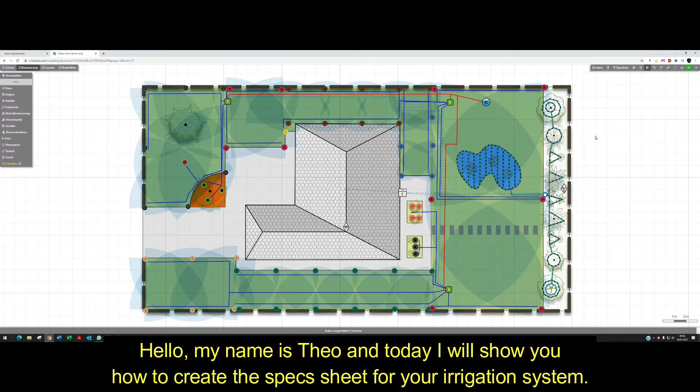The program can generate the spec sheet only if all components or pipes are connected. Also, drip start points and cables must be connected. Unconnected elements will not be displayed in the list.

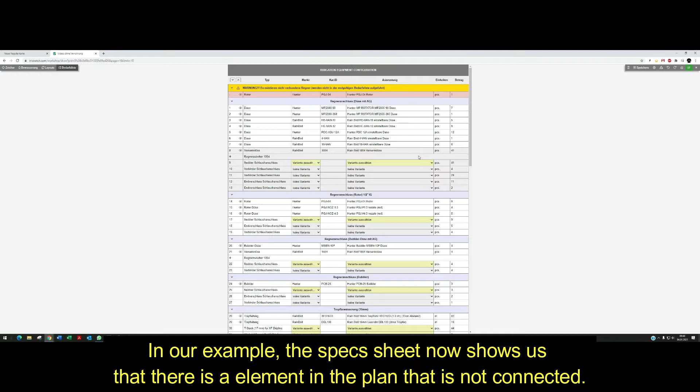To make sure that all elements are connected, we switch to the spec sheet. In our example, the spec sheet now shows us that there is an element in the plan that is not connected. In this case, it's a sprinkler.

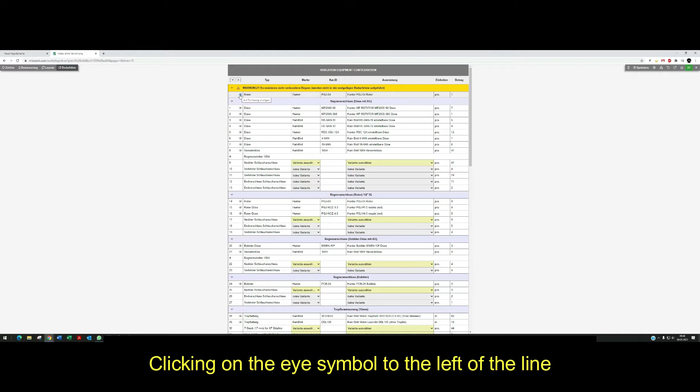Clicking on the eye symbol to the left of the line, IRRISketch jumps back to the irrigation plan and shows us the unconnected component. If we connect the sprinkler and go back to the spec sheet, the error message disappears.

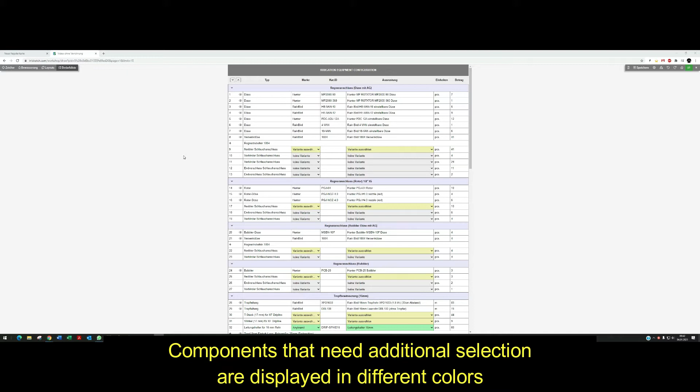The spec sheet automatically takes all the connected elements from our irrigation plan. Components that needed additional selection are displayed in different colors. And we have the possibility to select different products from different manufacturers.

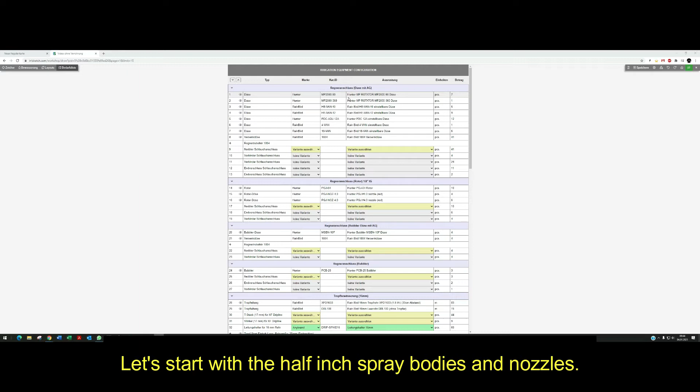Let's start with the half-inch spray bodies and nozzles. Here we can see all the installed nozzle bodies - the Rainbird 1804 spray body with the amount of pieces and the corresponding nozzle with the respective amount.

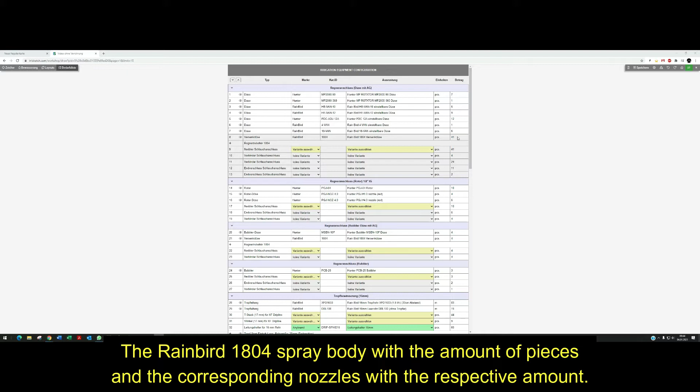MP rotators, HE-VAN nozzles, R-VAN nozzles and even classic spray nozzles. Below we have the possibility to choose different accessories for the sprinklers.

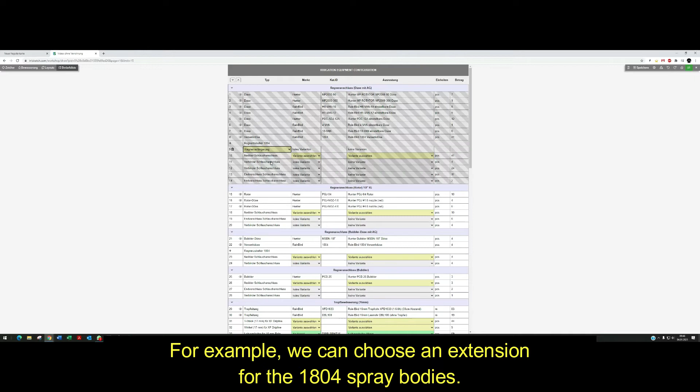Click the plus and a new row appears. For example, we can choose an extension for the 1804 spray body. Here we can determine the quantity.

And if we want to delete them again, we click on the trash can. One row below, we are asked to select a flexible connection between the spray bodies and the pipe.

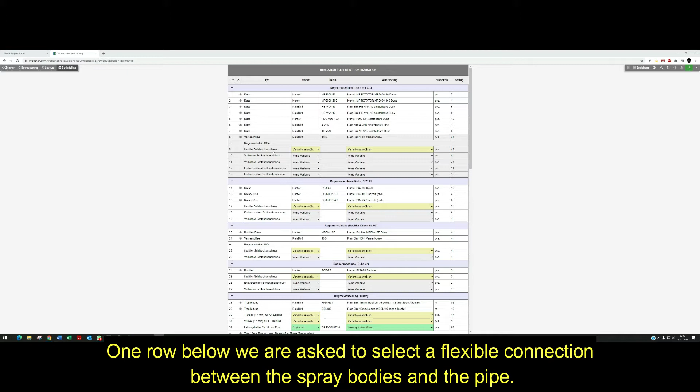The other rows are still inactive because they become active only after we select the sprinkler connection. We select a Hunter half-inch 30 cm swing joint.

IRRISketch automatically gives us the correct amount of the installed 1804 bodies. Now the other rows are also active.

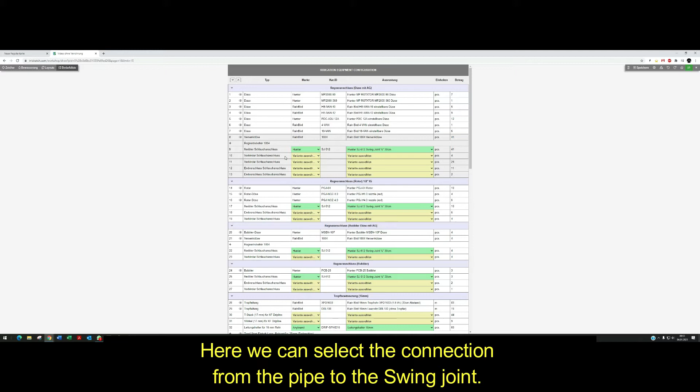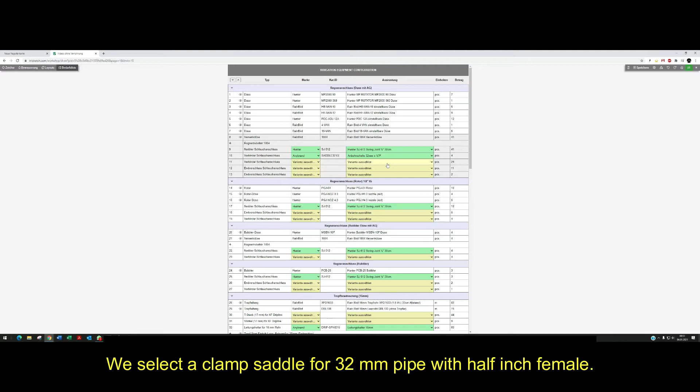Here we can select the connection from the pipe to the swing joint. We select a clamp saddle for 32 mm pipe with half-inch female. The program specifies 4 of these clamp saddles.

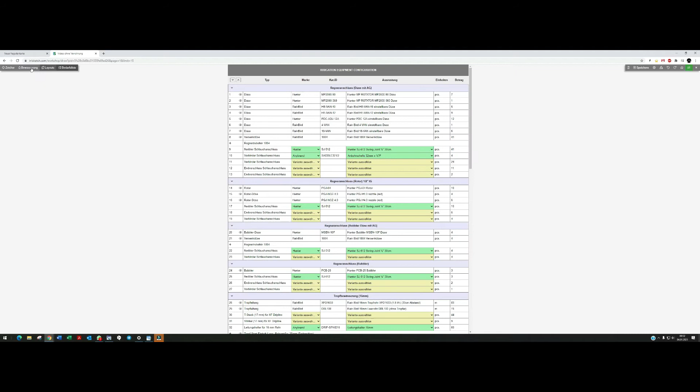Let's look again in the irrigation plan. Here is the zone with the R-VAN nozzles, 4 of them on the 32 mm pipe.

On this pipe, instead of the half-inch clamp saddles that IRRISketch suggested, we should select a 3/4 inch clamp saddle.

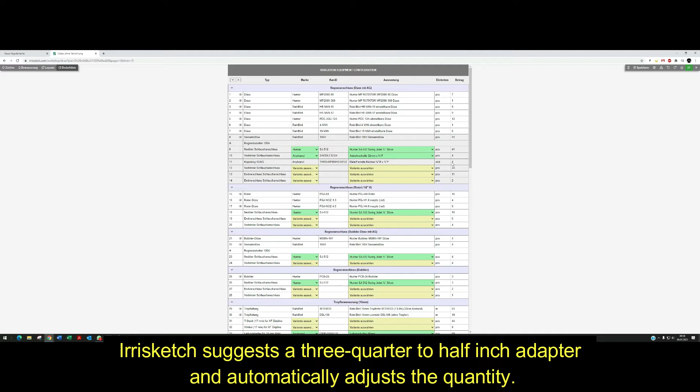IRRISketch suggests a 3/4 to half-inch adapter and automatically adjusts the quantity.

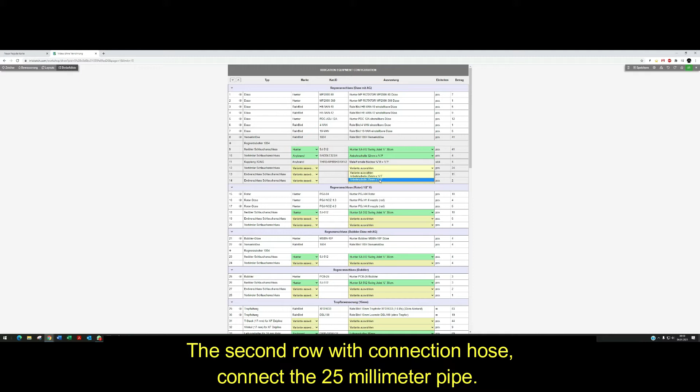The second row with connection hose connects the 25 mm pipe. Again, we choose a 3/4 inch saddle clamp. The number of adapters needed is automatically increased.

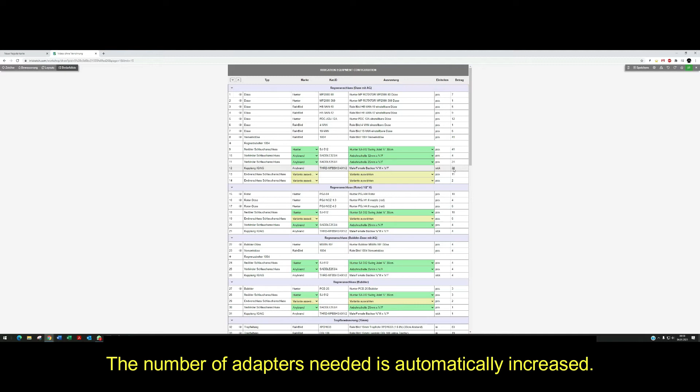In the next row, we are asked to choose the end caps - once for the 25 mm and once for the 32 mm pipe.

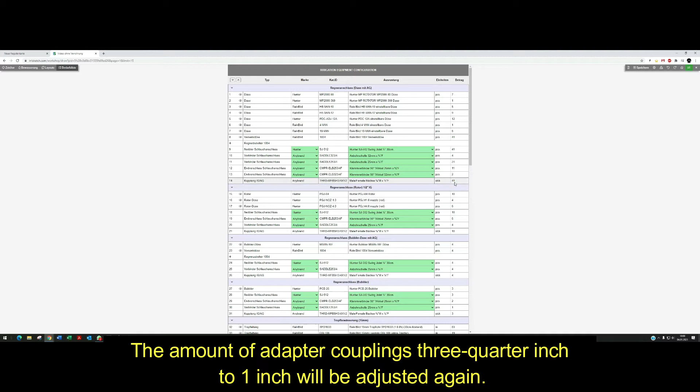The amount of adapter couplings 3/4 inch to 1 inch will be adjusted again. We can dispense with all the adapters in this case by simply changing the swing joint to one side half-inch and the other side 3/4 inch.

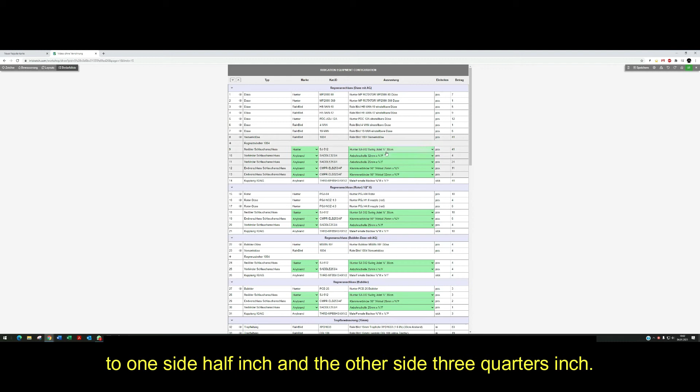IRRISketch will automatically apply our selection for the sprinklers to the half-inch rotor nozzles and the bubbler nozzles as well.

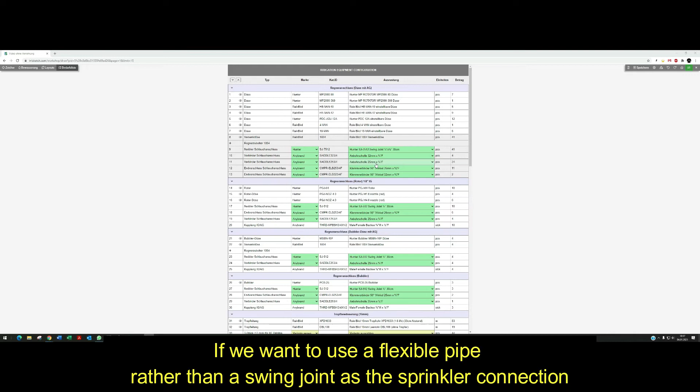If we want to use a flexible pipe rather than the swing joint as a sprinkler connection, we can pre-select flex pipe and clamp saddle in the configuration under sprinkler nodes.

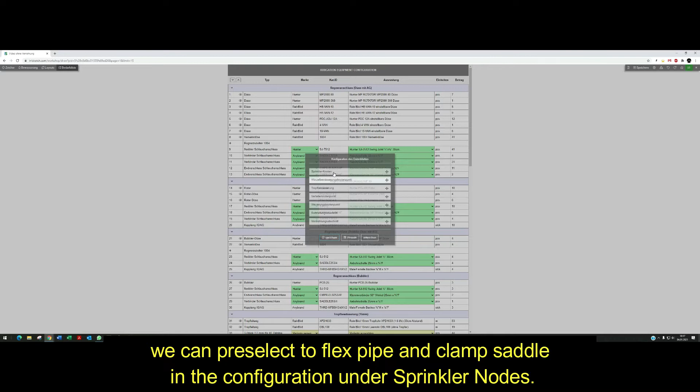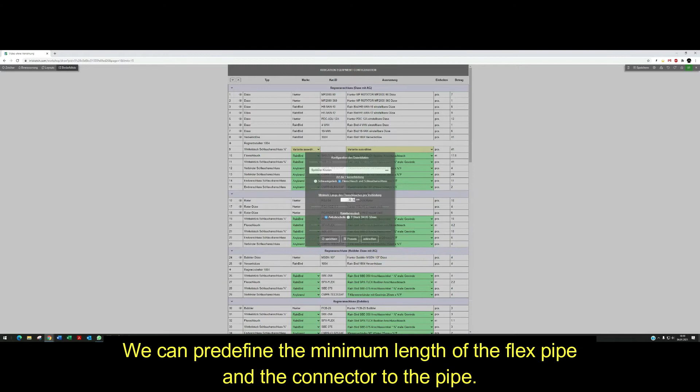We can predefine the minimum length of the flex pipe and the connector to the pipe, and if you want to use clamp saddles or T-fittings. We can select elbows or straight adapters as the end fittings.

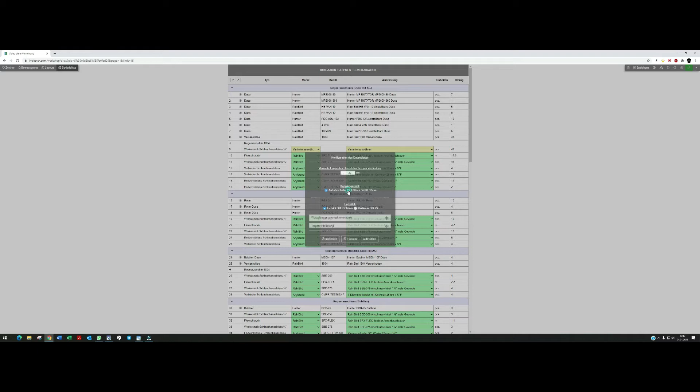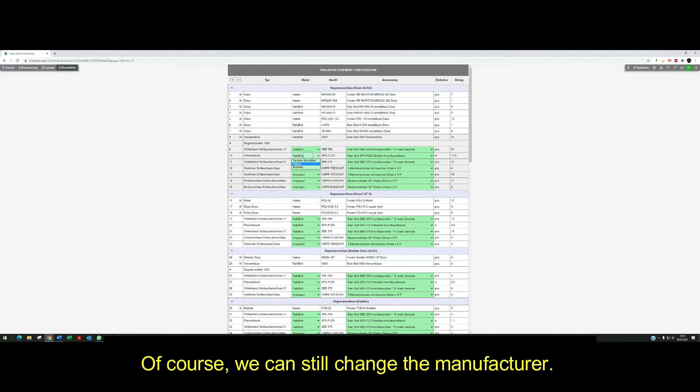We choose the elbow half-inch for the sprinkler bodies from Rainbird, also the flex pipe from Rainbird. Of course, we can still change the manufacturer.

The required quantity of the flexible pipe is 17.8 meters, as automatically calculated by the program. One line below are the elbows of 3/4 inch.

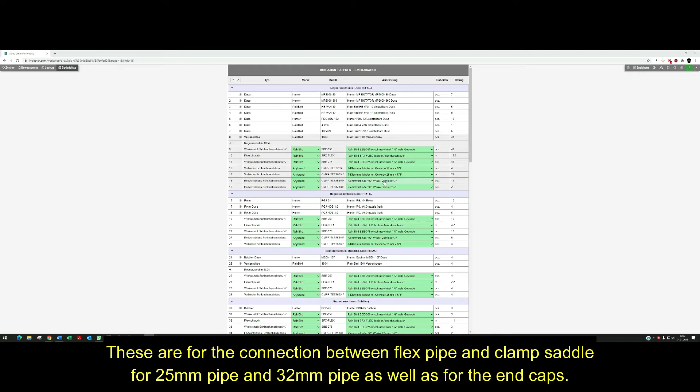These are the connection between flex pipe and the clamp saddle for 25 mm and 32 mm pipe, as well as the end caps. The rotors and bubblers have to be changed from swing joint to flex pipe.

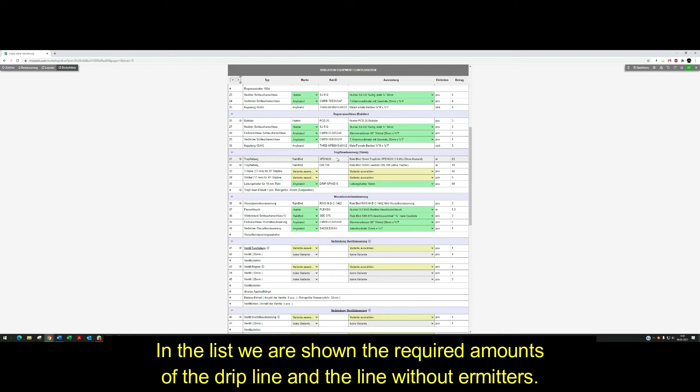Further down we find the elements for the drip irrigation. In the list we are shown the required amounts of the drip line and the line without emitters.

We only have to select whether we want the T-piece and elbows as barb or as twist lock variants.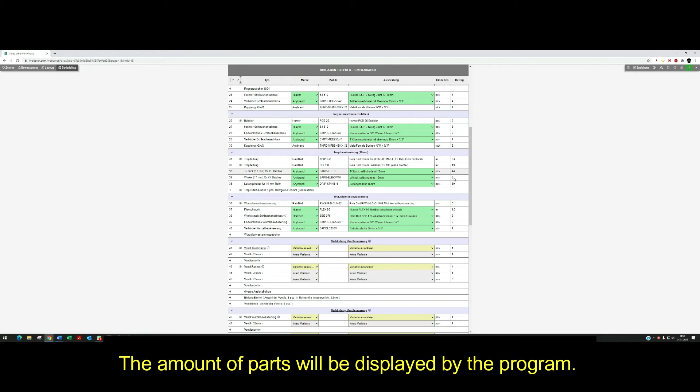The amount of parts will be displayed by the program. The amount of the tie-down stakes 60 mm is also given by the program.

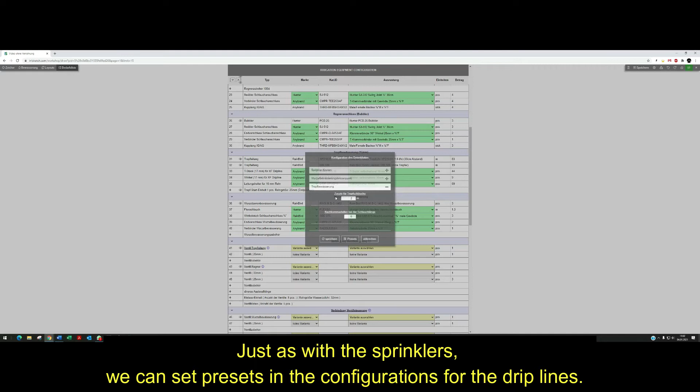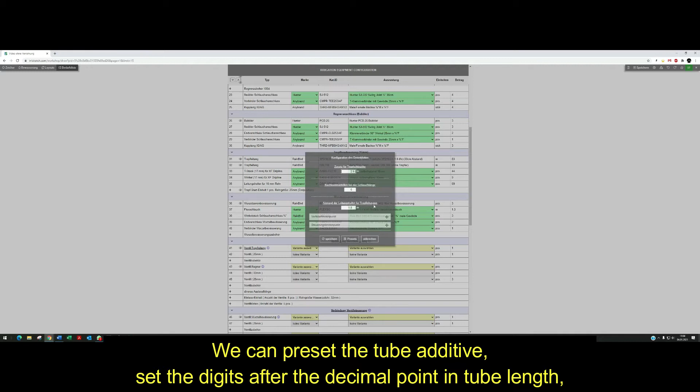Just as with the sprinklers, we can set presets in the configuration for the drip line. We can preset the tube additive, set the digits after the decimal point of tube length, and configure the drip line holder spike step.

We change the distance to 1 meter. Save, and already the amount of spikes changed accordingly to the length of the drip pipe.

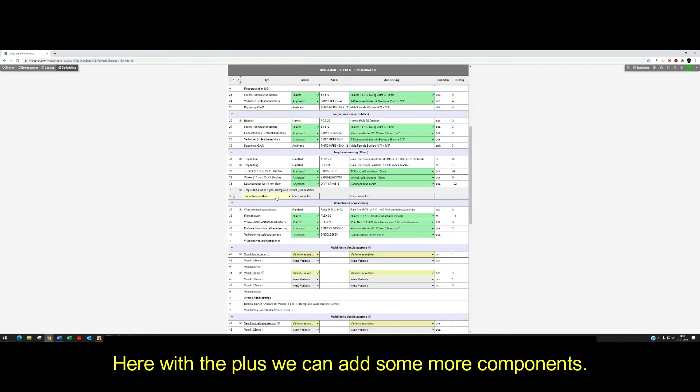Here with a plus we can add some more components. IRRISketch reminds us that we have planned one drip start, and here we could add a drip start.

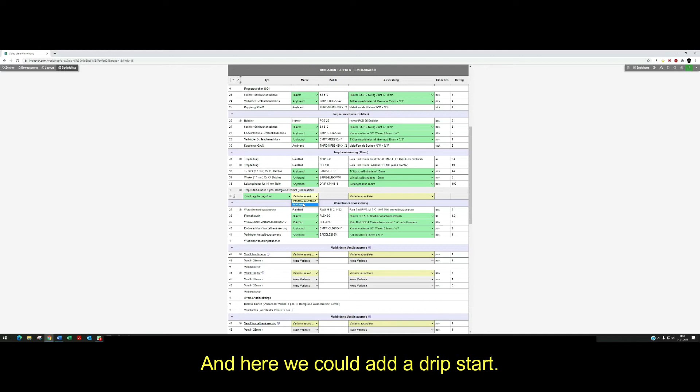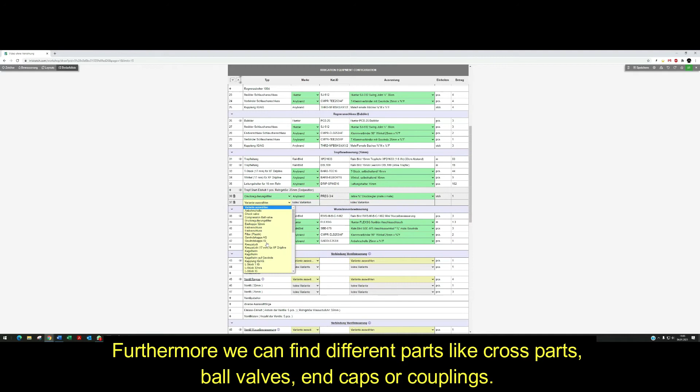The drip start unit, in this case the pressure regulation filter, can be added in the drip menu. Or we select a valve with pressure regulating filter. Furthermore, we can find different parts like cross parts, ball valve, end caps and couplings.

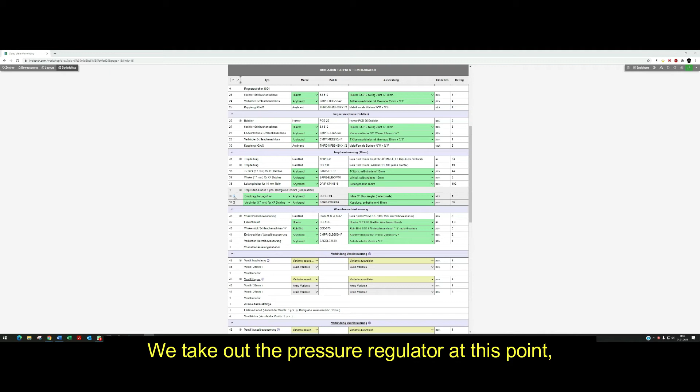We take out the pressure regulator at this point, because we want to install a pressure regulator filter in the valve box later. Now let's look at the valve box items.

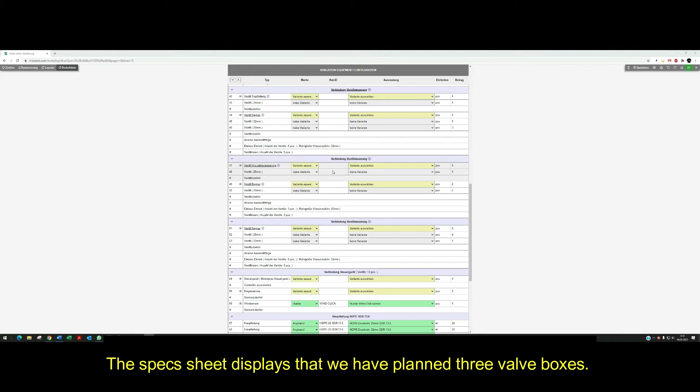The spec sheet displays that we have planned 3 valve boxes. If you want to know which of these valve boxes it means in the plan, we click on the i symbol next to one of the components. The program jumps into the irrigation plan and shows us the box.

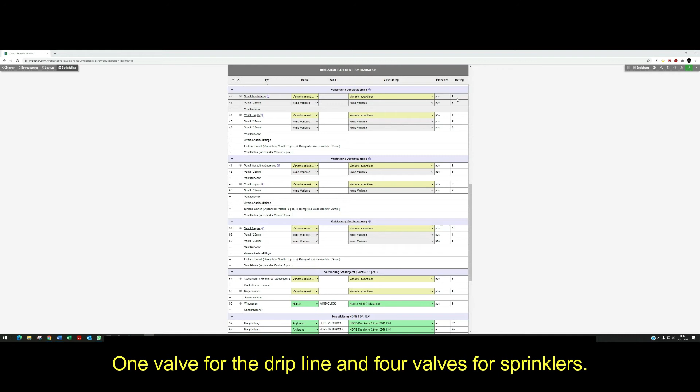In the first box we have 5 valves: 1 valve for the drip line and 4 valves for sprinklers. We select the valve for the drip line. We can go to different manufacturers and variants of different valves. In this case we choose a valve with an attached pressure regulating filter.

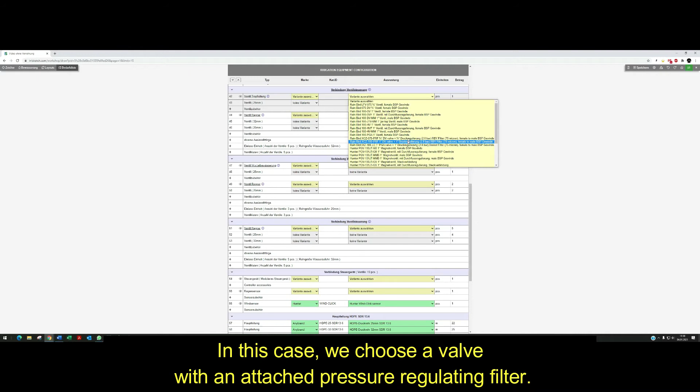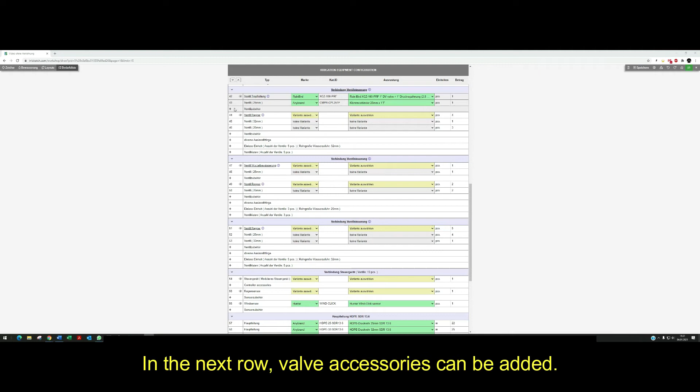The outlet connection from the valve to the pipe is already specified by the program. In this case, a clamp saddle with 25 mm to 1 inch female thread. In the next row, valve accessories can be added. We can add another row with a plus, but there are no accessories available.

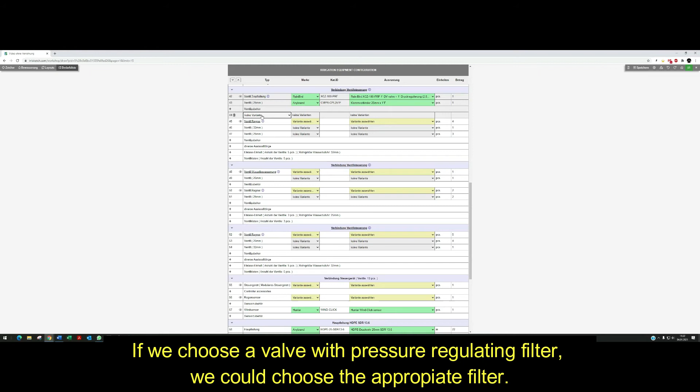If we choose a valve with pressure regulation filter, we could choose an appropriate filter. For the sprinklers, we select a valve without pressure regulation filter.

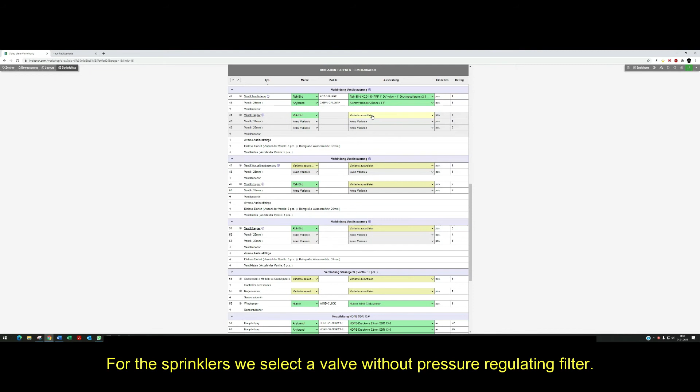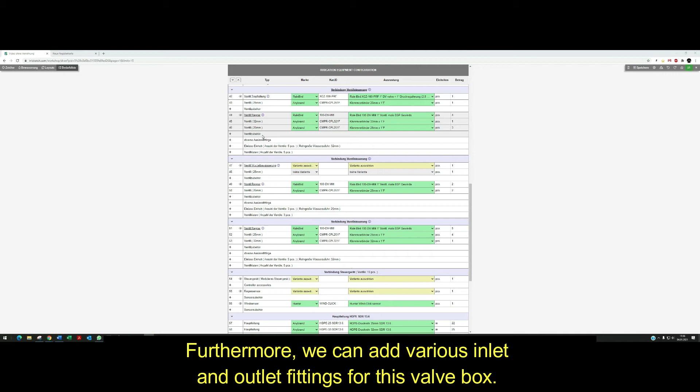For the 25 mm pipes, the system suggests the same outlet fitting as above. For the 32 mm pipe, we choose a larger fitting. Furthermore, we can add various inlet and outlet fittings for the valve box. The program gives us all inlet units. For example, we can select ball valves, water filters, various cross pieces and manifold mounting in the valve box.

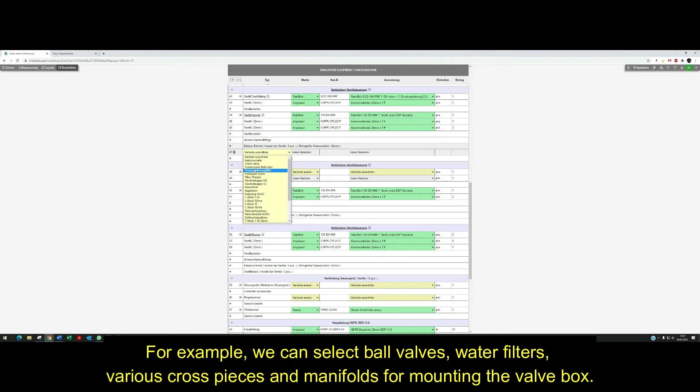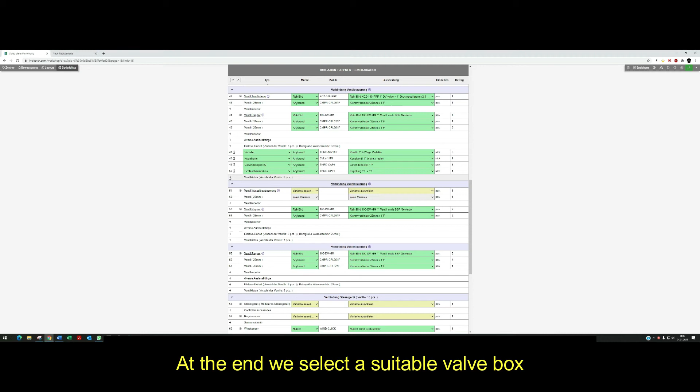At the end, we select a suitable valve box. The other two valve boxes are also configured according to our specifications.

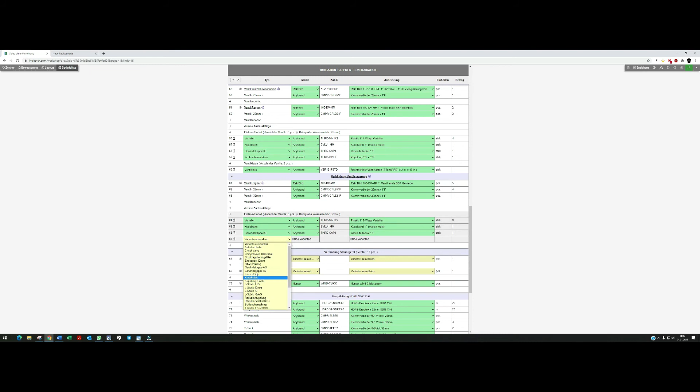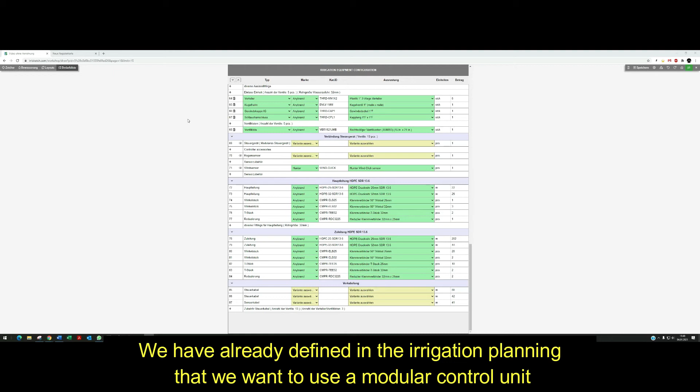Now let's select and configure the control unit. We have already defined in the irrigation planning that we want to use a modular controller unit, so we are only shown expandable controllers. We select the Rainbird ESP ME3 4-station controller.

IRRISketch automatically adds the appropriate expansion modules so we can control 13 valves. If we want to determine the expansion modules independently, we can choose between automatic and manual addition of expansion modules under configuration of the datasheet at controller.

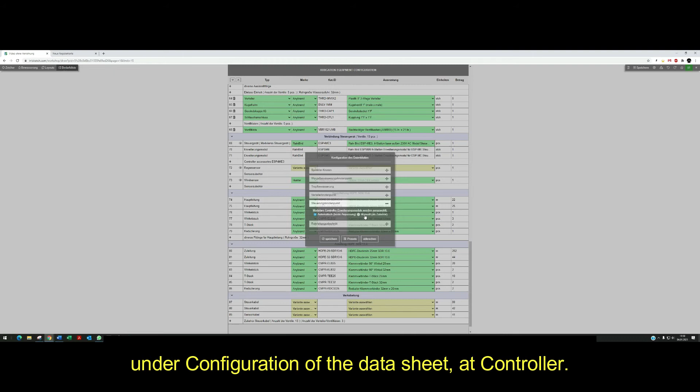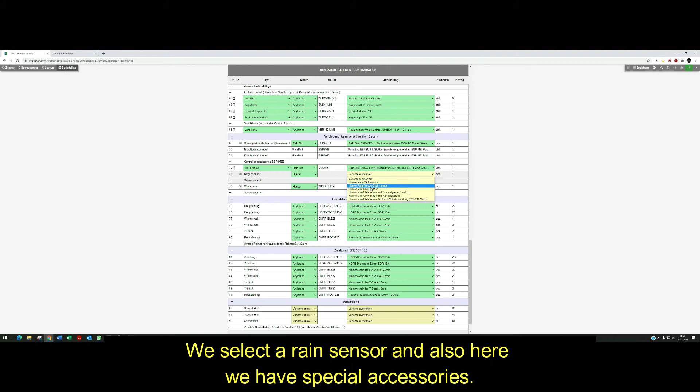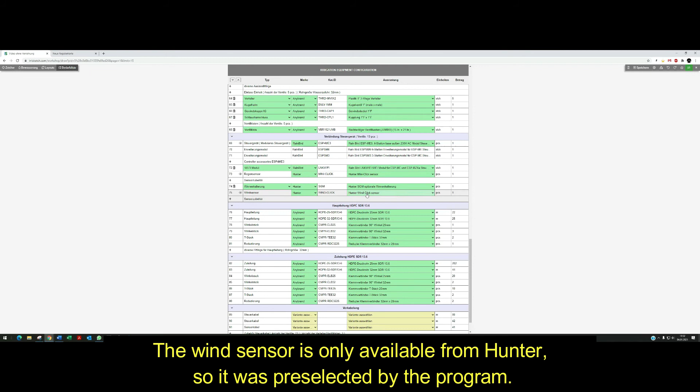In the row controller accessories, we can select accessories for the ESP ME3. In our case, for example, the Wi-Fi module. We select a rain sensor and also here we have special accessories. The wind sensor is only available from Hunter, so it was pre-selected by the program.

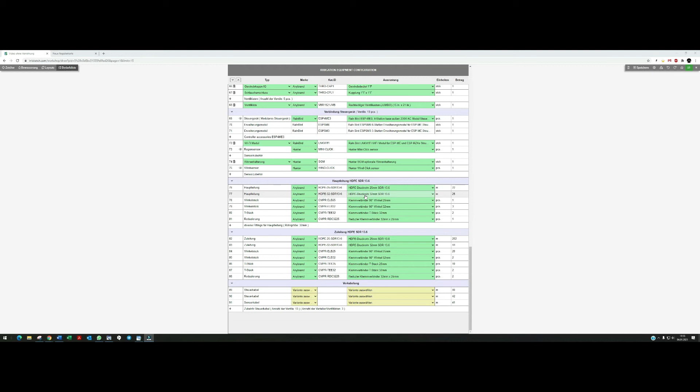Now we move on to the selection of the appropriate pipes. IRRISketch separates the main pipe and the lateral pipe in the datasheet, just like in the irrigation planning. As you can see, there is a large amount of different pipes. We see pipes with 25 and 32 mm diameter for the main lines and for the lateral lines, and accordingly many different elbows, connectors, tees and reducers.

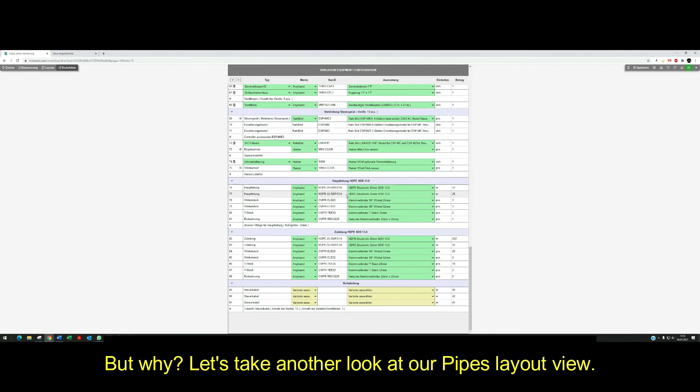IRRISketch default settings give a maximum flow velocity of 1.5 meters per second. A value above 1.5 meters per second would result in higher friction and pressure loss. We can find this setting in the irrigation configuration.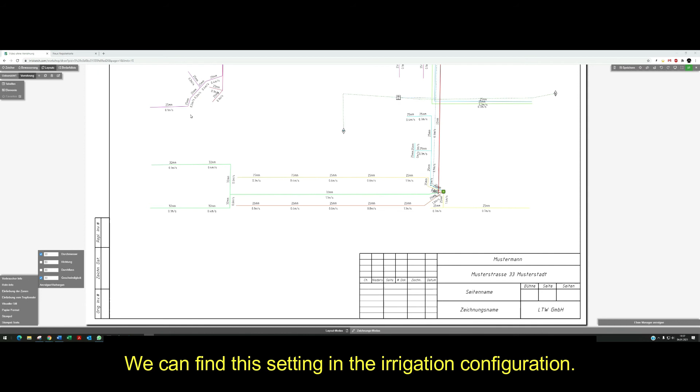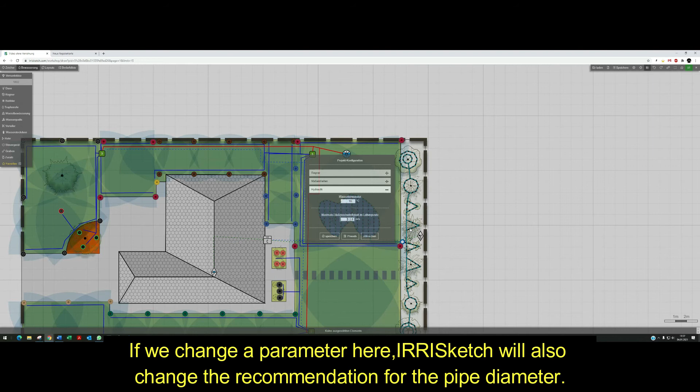If we change a parameter here, IRRISketch will also change the recommendation for the pipe diameter. So we could set a higher flow rate upper limit so that IRRISketch considers all pipes as 25 mm. Caution: you should only change this value if you are sure that the possible pressure loss in the pipe will not affect the irrigation.

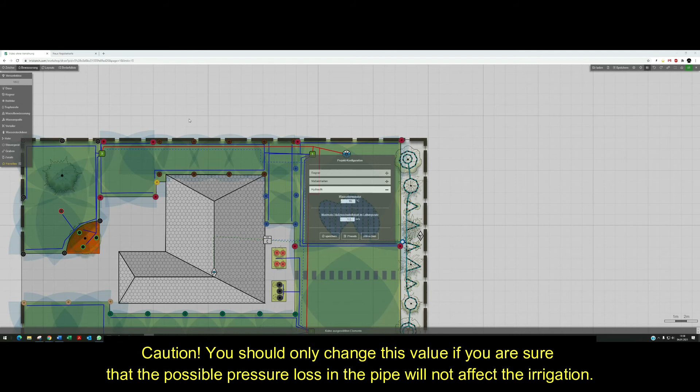Another way to solve the problem is to lay all the pipes in 32 mm. As you have already learned in the video on laying the pipes, we can choose the pipe diameter in advance. If we select a lateral pipe, the set diameter option will appear in the bottom left corner toolbox.

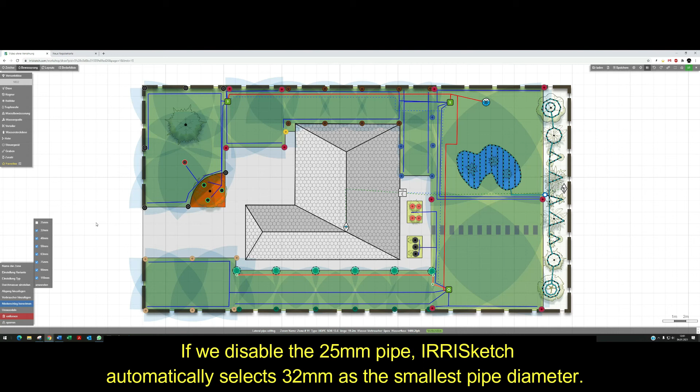We disable the 25 mm pipe. IRRISketch automatically selects 32 mm as the smallest pipe diameter. To quickly change all piping to 32 mm, we press Ctrl and select the entire irrigation system. If we release the left mouse button, IRRISketch shows us all selected items.

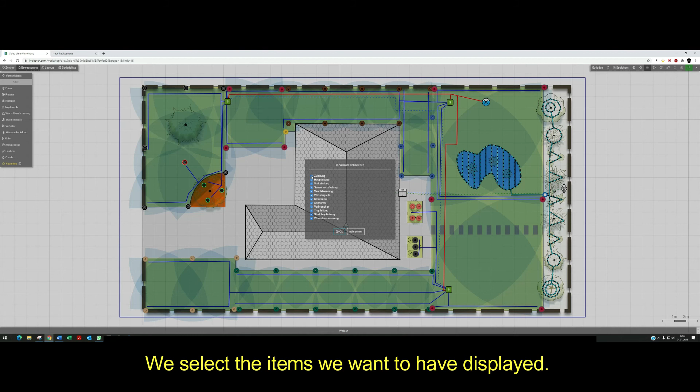We select the items we want to have displayed. We deselect all items except the lateral pipes. Now all lateral pipes are marked orange and we can define the diameter of all supply lines in the lower left corner. The same for the main pipe.

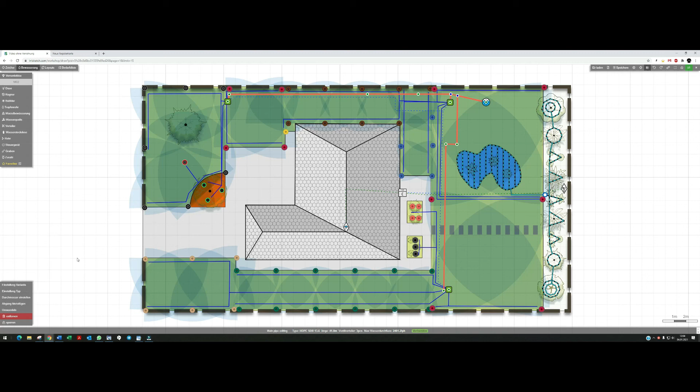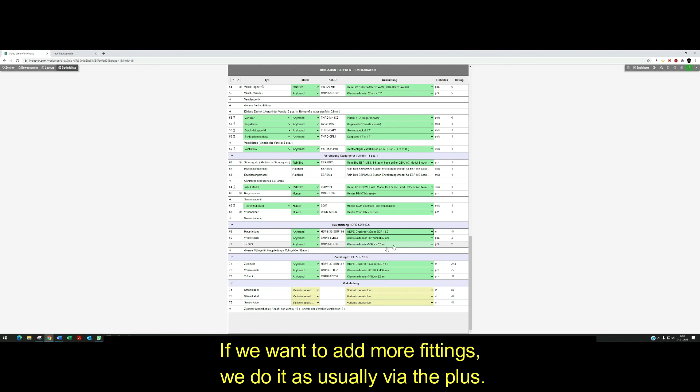Now our spec sheet is clearer and shorter. The main pipe and lateral pipe now all have the diameter 32. And the number of clamp fittings has been reduced accordingly. The number of elbows, tees and connectors has been recalculated by IRRISketch. If we want to add more fittings, we do it as usual via the plus.

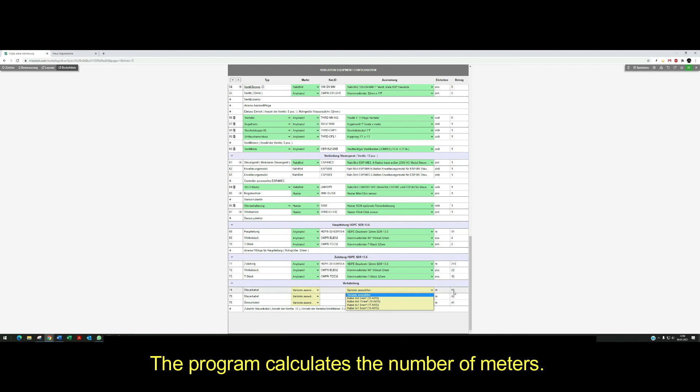Finally, we select the wiring. The program calculates the number of meters. We can select the wire diameter, IRRISketch differentiates between control wire and sensor wire. We can also use the plus button to select additional accessories for the cabling, such as rivet line, isolating tape or heat shrink tubing.

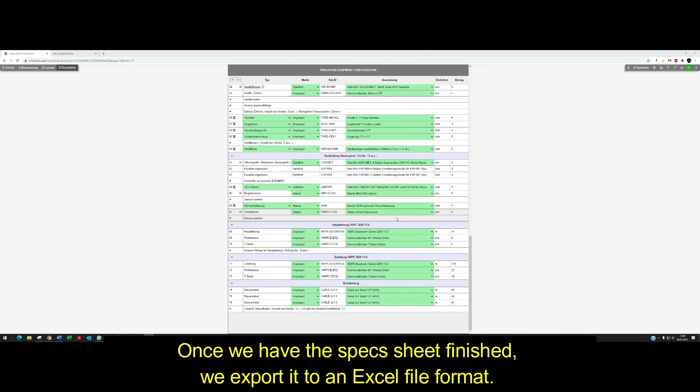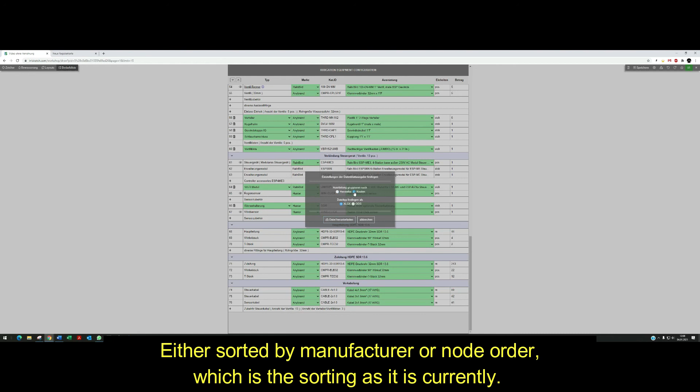Once we have the spec sheet finished, we export it to an Excel file format, either sorted by manufacturer or node order, which is the sorting as it is currently. We download both.

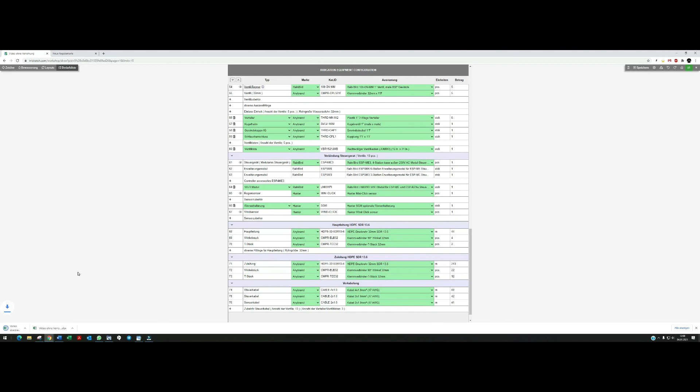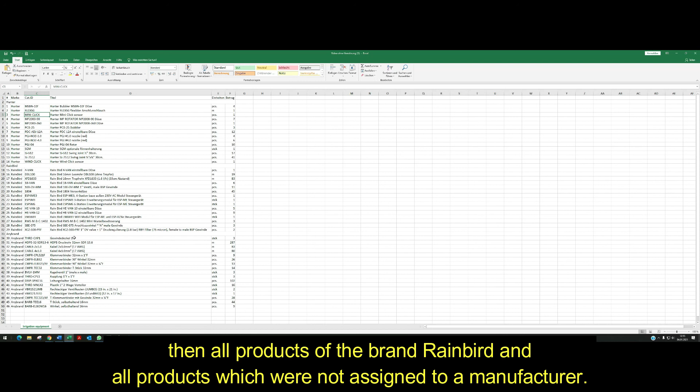This is what an Excel file looks like. Once sorted by nodes, so like in the spec sheet, or the sorting by manufacturer. Above we have all products of the brand Hunter, then all products of the brand Rainbird, and all products which were not assigned to a manufacturer.

Of course you can edit the Excel file further, add the prices or add material or labor. This way you can make an offer directly from the program.